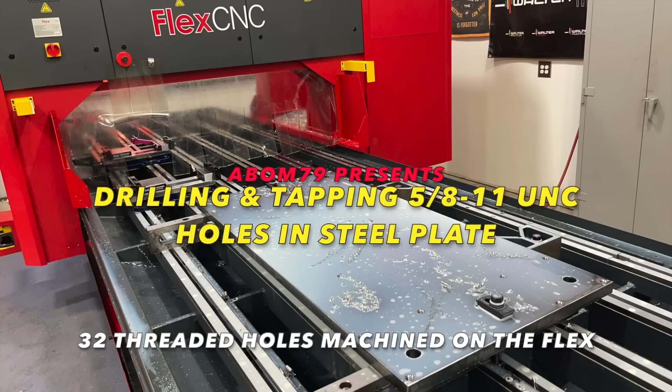Okay, so we just finished machining these plates right here with our tap size for a 2-inch UNC. So I'm moving on to the larger plates, these 27 by 59 plates down here. I'm getting the flex bed set up right now to accept these work pieces. Let me show you where I'm at.

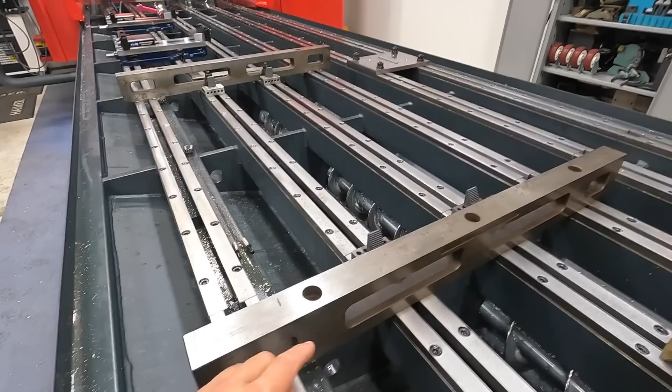Thought I'd fill you in on what we're doing. Since there's only 2 of these, it's pretty simple to set these plates down on the machine, tram in the side, and find the corner. I may end up putting a work stop up here, but for now this is what I've got set up. Got these large parallels right here, and this black line indicates how far from the end that plate's going to be sitting.

So I'm just going to have it centered on these parallels. We've got a couple of toe clamps holding them in place so they don't move. I use my machinist square to get them nicely squared up with the bed rails. Then I have these positioned centered so that whenever we do our machining, we'll have a 5/8 hole pattern in all 4 corners. This will straddle in between the hole pattern, so the holes will be on either side of the parallel on both sides.

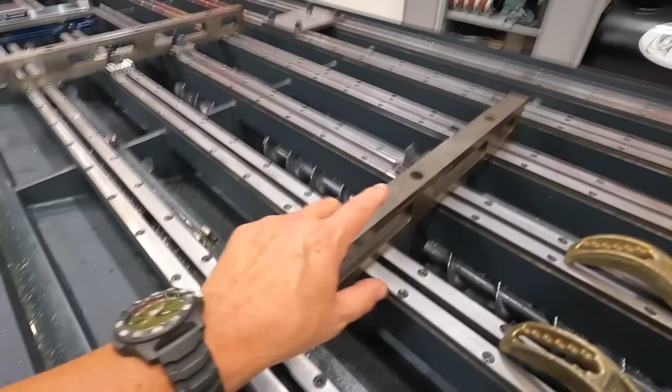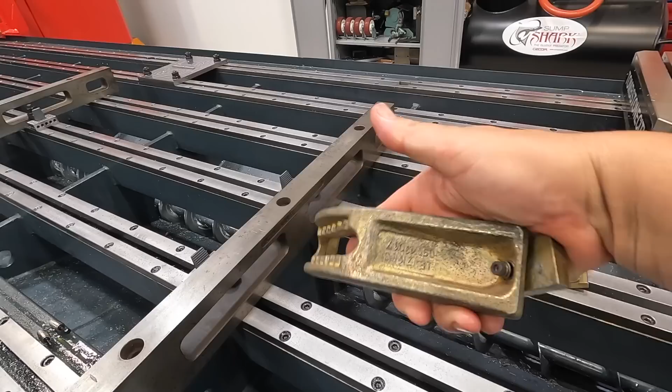Probably what I'm going to do is end up using some clamps like this. This is some of those Lenzkes - yep, Lenzkes, we got these. I've got some bigger ones as well, and we may be able to clamp, because really what I want to do is reach over the plate. It's going to be hanging over this parallel just a little bit, so we may go with the larger one so we can reach over the plate and clamp down on top of the parallel, not out here where it's overhanging.

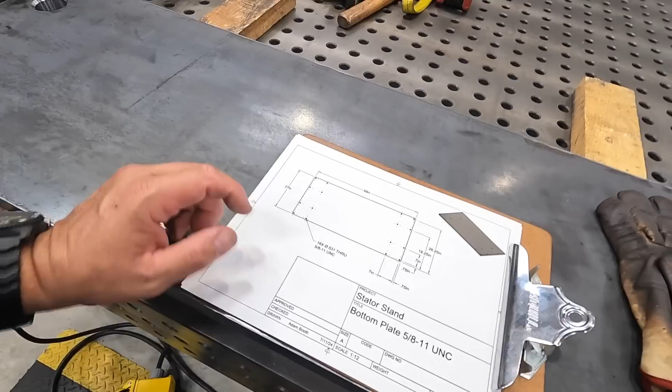But I needed to do that because the holes on these plates - I'll show you, here's our print for the bottom plate. You can see how close to the edge of the plate our holes are. You only got about 3/4 of an inch - well, it's 3/4 from the edge to the center of the hole, so they're going to be right out on the edge of the plate. So we have our parallels going right between the hole pattern. You got 7 inches center to center, and we got our parallel sitting right there.

All right, so that's what I'm working on. I'm going to continue to get this set up. We still got to get it up here on the table and get it clean. I still got slag under the bottom, and I want to get it cleaned up like we did these guys right here. So I'm going to keep working on that and bring you guys back whenever we make some more progress on our setup here.

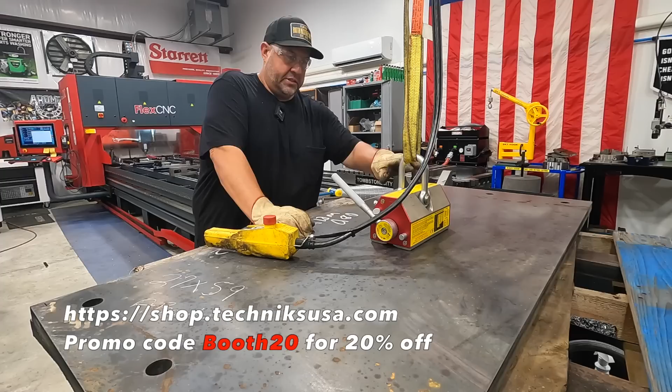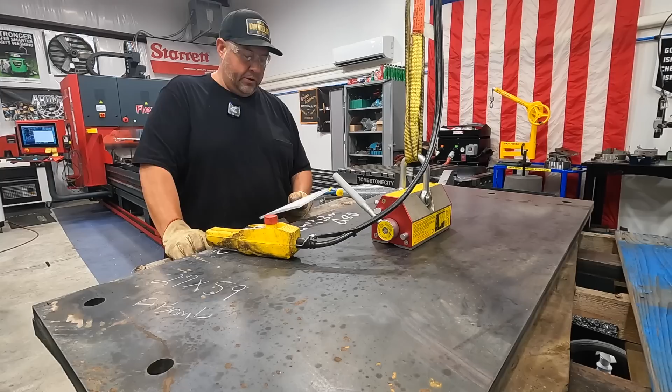I have been absolutely loving my new earth chain magnet. This is the ELM 600, good for 1,300 pounds. I was going to mention the weights of these earlier and kind of forgot, but I had this written down, and you guys can correct me if I'm wrong. We got 1.25 inch thick material. These plates right here I've estimated weigh about 578 pounds a piece, so right around 600 pounds each. And then the ones with the 2-inch holes in them weigh about 256 pounds a piece, so those aren't too bad.

We could technically lift both of these steel plates if they were clamped together with that one magnet, but we're not going to do that - just going to do the one. What I love about this thing is that I can position it where I want and then engage it with this handle. My dad's old Magmate, which is tried and true and we used for many years on a lot of jobs, gets the job done, but you have to use a little more muscle to get it positioned, because there is no on and off - it's just a cam lever that picks one side up off the material, then you have to pick it up off there. This one just allows you to set it in place, maneuver it where you want, and then engage it. So it just makes it a little more convenient.

So we've got it centered up on here, plus the weight of the Noga and the camera on that side.

All right, we're up. What I usually do is try to jar it a little bit, bang it around.

It's not going to come off there, so we're going to set it right over here on the table so I can get it cleaned up. We'll just be doing one at a time. I really don't have enough room to put both of the plates up here, so we'll do one and then work on the other one.

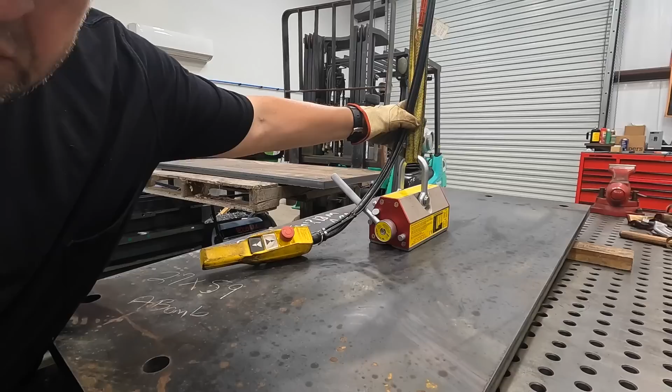I think what we'll do is go ahead and hang it, gotta move my tools over here. We'll hang this right side off of the table, and then the front side we'll hang it off there as well. Then I'll just rotate it.

There we go, I'll just leave that there. Get two sides cleaned and then rotate it and do the other two sides.

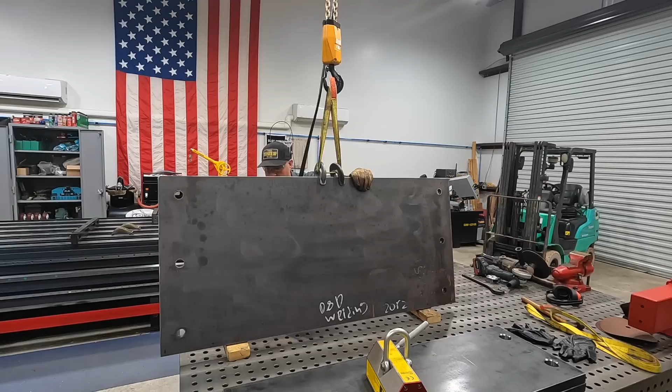Well, we successfully got her flipped over. You can see how nasty and dirty the bottom of it is. I think a lot of that's just from the table that they burned this plate out on. I'm sure they got a big flame cut table. I believe it comes from Sabel Steel, who usually cuts this stuff out.

Just go ahead and get some of the dust off of it.

I know it's not ideal to be doing cleanup work like this around your machinery, but this is what I have to work with right here. So it's something that I accept because I have my crane in here, I have my forklift right here. It's easier just to do this right here in the shop than it is to try to do this outside in the rain and the heat and without the jib crane here to help me get it done.

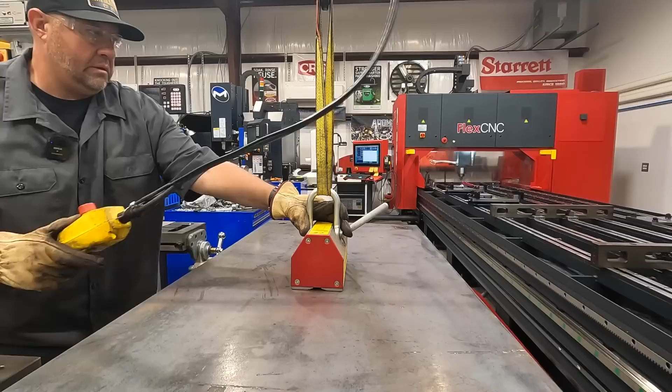Definitely not flat. I think I have the plate where it's going to work right there.

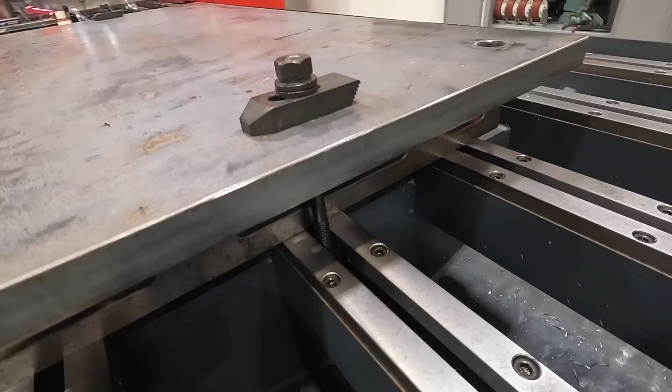I ended up going with a different clamping method than what I had originally planned, it just really wasn't working out. So I've got the plate shifted over that way so that those burnt out holes, the one in the center, is lined up with this rail right here. And so I have a stud and a strap clamp on both sides of that, right in the center, out of the way of everything.

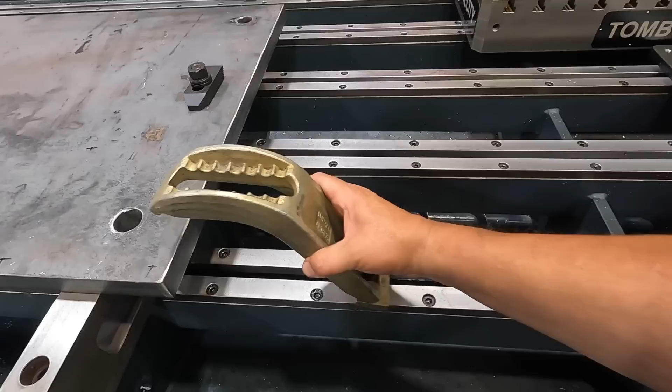Now I've got some Sharpie marks here indicating about where the holes are going to be drilled, and you can see where they're at. The problem I was having when this was slid over here, even centered up on those rails, I was going to try these large Lenco clamps, go in there like so and clamp it down. But the problem is where this was shifted at, this hole right here, and of course that one there, the clamp was right directly over where that hole is, so that wasn't really going to work out.

Now we could do it like this and put the Lenco clamp right in here somewhere. The problem I have with that is you can see how close to this hole it is, and it's still kind of close to that one too. So I would rather not be so close to a clamp and a stud and a nut up here where that hole location's at. So I was trying to come up with another easy solution, and that was the simplest way to do that.

I would rather have 4 clamps, but honestly we're just drilling and tapping holes. We're going to be doing a little chamfer on there, but I don't think all of the downforce we're going to be putting on that is going to make this plate shift around with those 2 clamps torqued down the way they should. So that's what we're going to go with.

I'm going to see about adding a couple of work stops, maybe to the back and maybe on this end here, we'll see if I can get those to work. But if those don't work, since we only got 2, it's really not a big deal to set it on here. We'll tram in the side, get that nice and straight, and then we'll find the corner here, and that'll be our work coordinate location, working off of that side.

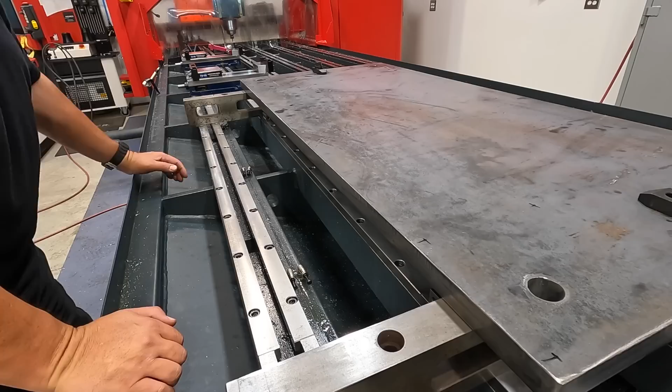Okay, we need to go ahead and get this plate indicated. We need to make sure that it's nicely aligned to our x-axis. So I thought we would do this a little bit different than I've traditionally been indicating. Normally we attach an indicator to the spindle and use the gantry to run up and down the parts to indicate. Always works really well. But let's try it another way.

I've got more of an old school machinist tool over here that we're going to use, and that is the Starrett number 57 surface gauge. We're going to use this as a reference where this plate is at right here. We're going to run this surface gauge up and down this bed rail here and use the pointer of the scriber to just kind of visually see how far away it is from end to end.

Once we get it kind of close with our scriber, we'll take this off and put a dial indicator on here and use it in the same manner. We'll set up a dial indicator and run this surface gauge up and down the side of the plate here and get it bumped in, just like if we used the gantry to run the indicator up and down it.

So how we're going to do that on your surface gauge, you have these 4 pins that push through. I'm just pushing that back when it's sticking down a little bit. There's a little spring inside that gives it tension. So we're going to push the front pins down on the surface gauge, and this is going to serve as a fence, a guide to guide the surface gauge down this rail.

The inside of this rail was actually machined. Whenever we set the machine up, we milled these to size, so we have a nice machined surface on the inside of the rail. The outside of the rail has not been milled, but it's probably pretty close, you could use that as well, but we're going to use the inside of the rail.

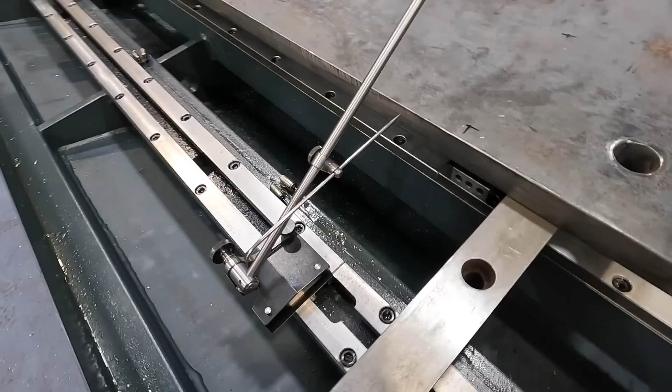And now we're just going to go ahead and use our fine adjust and run this pointer or scriber right up to the edge of the plate.

All right, so now we're scratching that side right there. And then what we can do is just run this down.

All right, and the plate on this end is actually going that direction, so we are crooked. And if you run this all the way down to this other side, we have a little bit of a gap there. It may be hard to see, but we've got about 1/8 of an inch gap, so we're somewhere around 125 thousandths or so, pushed that way, just right here, probably a little bit more as you get a little further down.

So now that we have our reference where we can run this back and forth, and it's just touching right here, what we'll do is go ahead and run the scriber down to this side with our surface gauge.

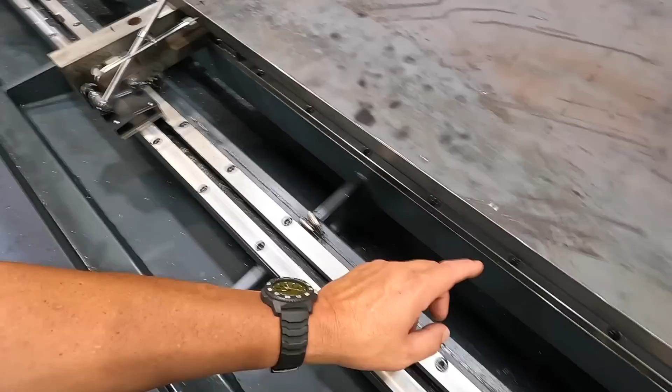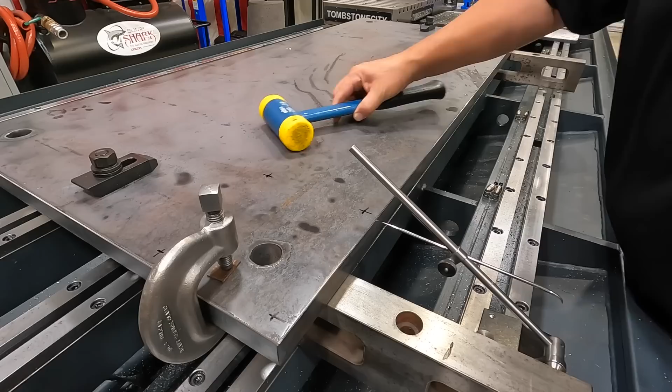Now we can start bumping the plate this way and try to get it to just kind of scratch the surface on both ends of the plate to get it pretty well even. Then we'll take that out and put our dial indicator on there and bump it even closer. I've added a heavy duty C-clamp here to give me something to hit, just because the other side of the plate is so far away. I'd like to be able to stand right here and see the gap as I bump this plate around. Let's see how it reacts first.

Yep, I can see it moving over, so just gonna make sure our surface gauge stays there. Now we're scratching this side as well, so we'll slide her down here to the other side and compare it. And it's scratching this end about the same, so it looks like we've got it pretty well even from end to end with our surface gauge.

Now we can go ahead and put our dial indicator on there and check it with that. We'll take the scriber off here to get it out of the way, so I don't risk running my hand into it. So we have this attachment here, the 57S, Starrett 57S, and it's a universal snug that'll fit on the surface gauge rod just like so. You've got a few different size holes in there for different stem sizes for all the different test indicators. So we're going to use our Starrett 196 back plunger indicator here.

We can just simply slide it up through the hole that matches the rod there, and we're going to hang it in a manner just about like this. We'll have to get it adjusted once we get it on the mill. Then we can use this like we did our surface gauge, our scriber I mean, and run this up and down the machine, taking direct readings with our dial indicator there.

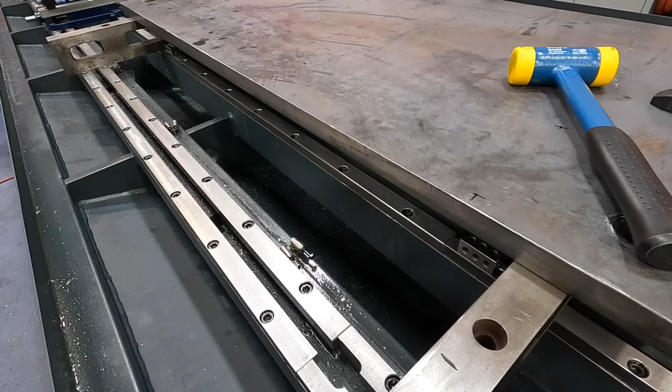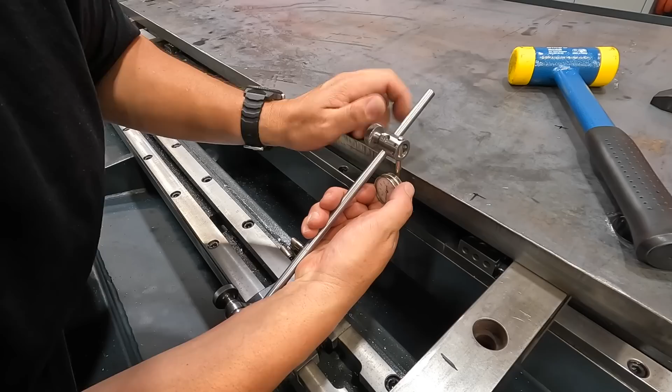All right, we're going to take our surface gauge utilizing our pins just like before. Set it down on the bed rail here, pushed up against the inside of that rail. Now we can adjust our rods here to get the indicator over a little closer. We'll tilt that one down a bit more and then loosen up the 57S snug, get it kind of close like that.

Now we have our fine adjust that we'll use to adjust the indicator. I'm going to twist that around just a little bit more. All right, about like that. So let's go up against our workpiece and use our fine adjust, dial it into zero. Now we can keep it pushed against the rail and slide this down, taking a direct reading.

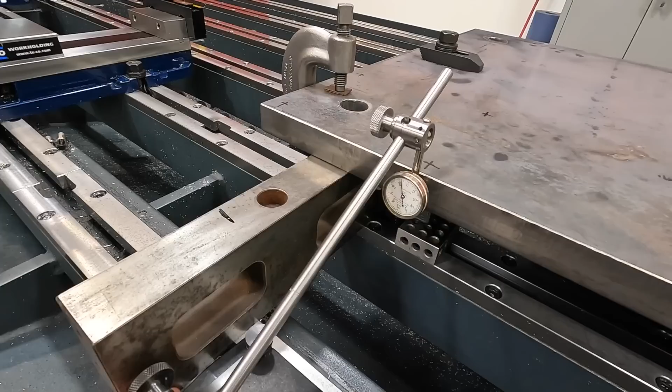So how close do you think we got it? I haven't bumped it since I used the scriber, and I just slid it down, and it looks like we are, I don't know, that's showing about 7 or 8 thousandths low on this side. So let's slide her back down.

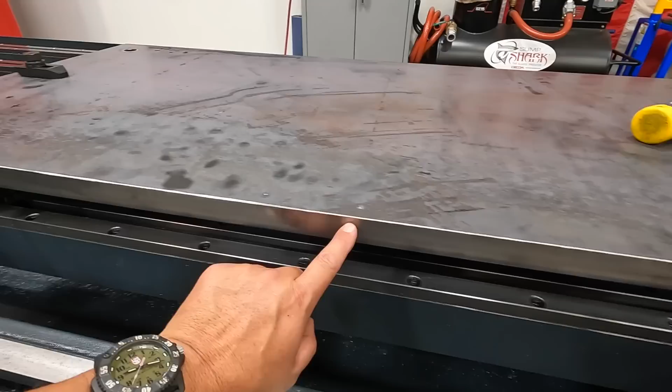All right, there's our zero point right there. So that's all we got to do is just use that in this manner right here. Now keep in mind, we are indicating a flame cut edge, so that is not a perfectly flat, smooth edge there. All we're wanting to do is just get it referenced about as close as we can from one end to the other, being on the same plane, and our same plane being zero on our dial indicator.

All right, so we'll be able to take our hammer and just go ahead and bump this clamp again, and we'll try to get as close as we can, zero and zero on our dial indicator.

All right, let's get our reading and see how close we got it bumped in there. Go ahead and slide this down, and you don't have to run it all the way down on the face the whole time. You can just bring it down here and then bring it right back in. Remember, we're going to this line here as our reference, so we're just kind of using that area. Looks like this side's 2 or 3 thousandths high, so that's an easy fix. We'll just take and bump this corner right here a couple thousandths back, and then we'll take another sweep and see where it's at.

All right, let's take another sweep and see if we've got it dialed in there. We just bumped it, tried to move it about 2 or 3 thou. That needle is hovering all over 0 there. You got some high and low spots, but I think we're averaged out really nice. So if we just keep it pushed in there, let's see where it's at. You can see it's just bumping around a little bit. You got a little bit of a low spot right there, but as we come right back down here to our edge where we started, right there about on the 0. So I'm gonna call this guy indicated in.

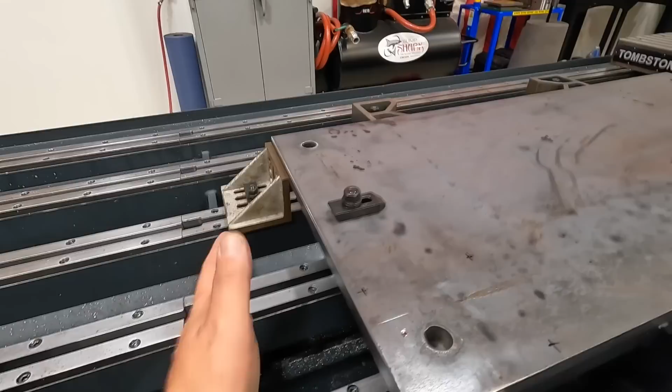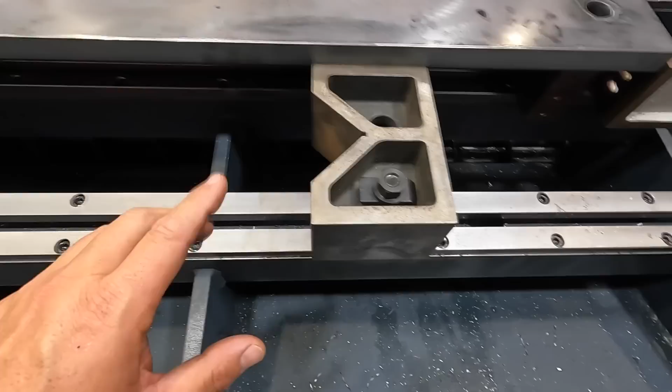Okay, we've got our 2 clamping studs torqued down nice and tight, and I've got our work stops set up now too, and these all work pretty good. That shorter angle plate worked perfect for this side right here. We got it pushed up against and tight, and then we got some V-blocks on the back there that worked out pretty good, let me show you those. This pair of V-blocks that I had in the box just worked out perfectly, everything aligned really well, so this was super helpful. Just went through the casted hole there and clamped it down. We've got it pushed up, so we have 2 of these to be able to push it back up against there, nice and tight. This guy is ready to go.

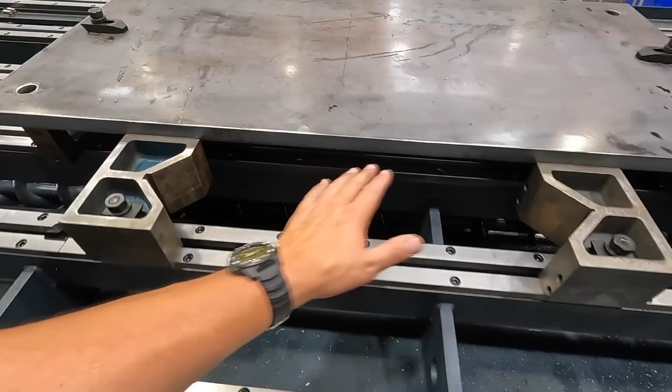So this is gonna be our origin point right here. We'll touch off here for our X0 and then touch off over here for our Y0. Okay, we got our Haimer 3D probe installed. Let's go ahead and touch off. This is gonna be, I'm gonna use G56 for this work offset. All right, we'll do X first.

Just about got to use some binoculars, it's so far away, but that's close enough. That looks like it's about on 0, so I'm gonna hit X for G56 right here. All right, I have our X zeroed out right there for that side. We'll back it off.

We're gonna do Y. That would be good enough. All right, let's bring her in. I'm gonna slow her down so I don't crash it. There we go, let's go down to tenths. All right, looks close enough. I'm gonna hit Y for our G56, set position. All right, there's our X and Y done.

Now I'll just take a tool, probably use our 17/32 drill bit, and I'm just gonna bring it down and touch it onto the work surface using a piece of paper. But before we do that, let's go ahead and easily back this out. We're in Y, so I wanna go back, get it off there. All right, then we're gonna go up in Z. Just like that, you bring it to me and take it out. I have our 17/32 drill bit loaded up.

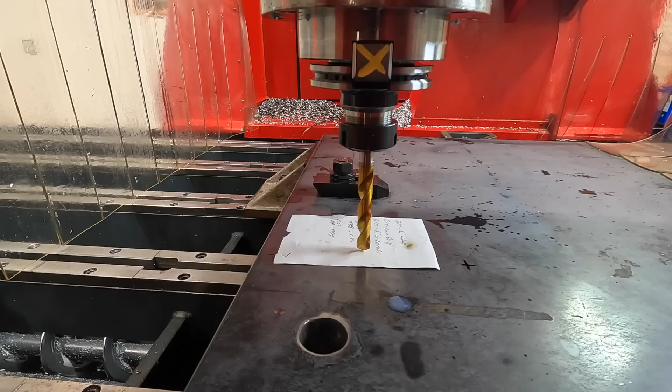This is the drill we're gonna use for the job, and we're just gonna do the old school trick. We're gonna touch the face of the workpiece off here, but we're just gonna touch it to that piece of paper. I've got it really close, and I'm just using the incremental jog distance of 1/1000, and we're just gonna come down until it gets tight on that paper. So every time I click the button, it goes down 1/1000 of an inch.

Let's do it like that. Now I can feel it getting closer. I usually, once it gets to about there and it starts getting tight, I go down about 1 more click, and that'll be close enough. So that should be within maybe 2 or 3 thousandths of this work surface. And keep in mind, this is a hot roll plate, so the surface is going to have a little bit of waviness to it. We're just trying to find a nice average. We have a clearance of 200 thousandths, so all the tools come down to 200 thousandths above the surface there, and then it begins its feed at that point. So this is going to be really good right there.

So we'll go into our work offset. It's going to be G56.

And we're going to Z this, subtracting the length of our H19 for tool 19 right there. I just ran through my typical air test with our workpiece, and everything looks good. I've double checked my program, and I even made an adjustment.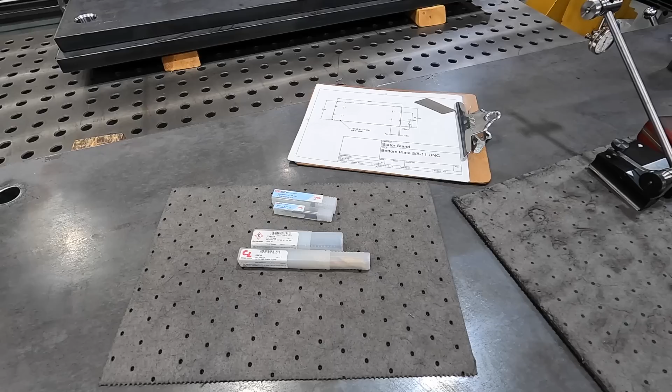We might have to wait a few more minutes on making chips because we've got a huge thunderstorm about to roll through. There's a lot of lightning, and I don't want to risk the power glitching on us in the middle of a program. So I'm probably going to wait for that.

I feel bad for all the people out on the beach because today is the big Blue Angels Air Show, and they expect about 150,000 people out there. You might be able to hear that rain coming down - they're getting hit with lightning and thunder right now too.

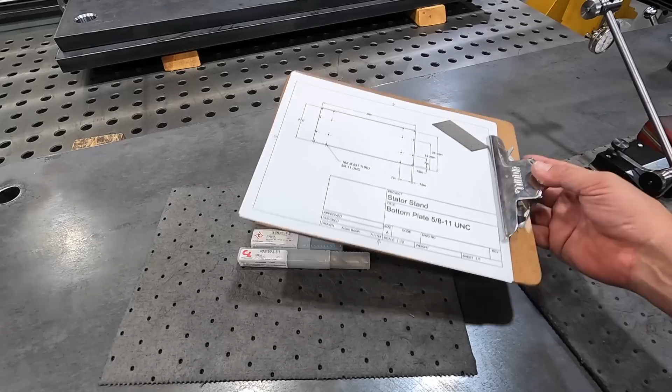So anyway, I wanted to show you this. This is my drawing that I made, and you can see where all of our hole locations are. This is going to be our origin point right here - this is where we touched off our Haimer probe, and it'll actually start on this corner though.

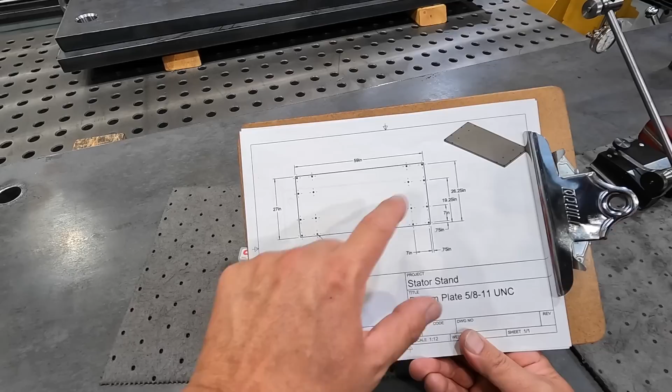So it's a very simple program. We're going to spot all the holes, then it'll grab a drill and we'll drill all the holes. Then it's going to grab that same tool that we spotted it with, chamfer all the holes, and lastly it'll grab our 5/8 tap and tap all the holes, and then that'll be it.

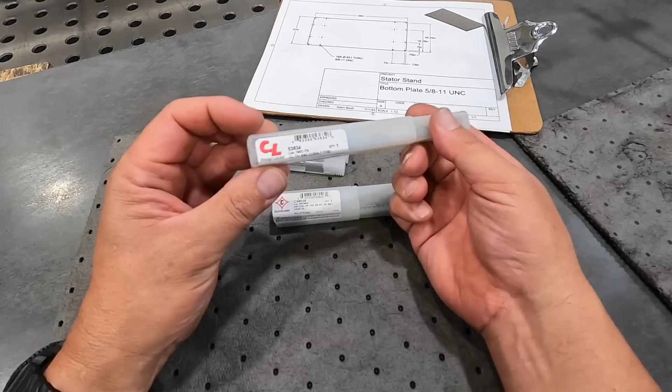All right, so the cutters that we're going to be using - I wanted to show you what we're going to be running today. I got a couple new cutters for this job. Our drill is going to be the Chicago-Latrobe reduced shank drill. This is high-speed steel, 1/2 inch diameter round shank, with a 118-degree split point, and I have 2 of these.

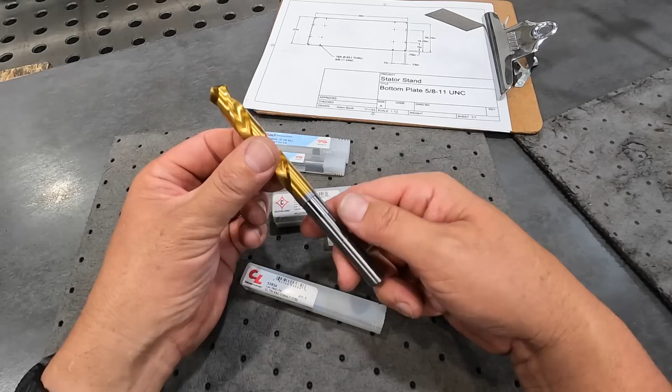These are inexpensive when you compare the price to a solid carbide drill. So I got a couple of these, and we're only doing 32 holes - it should last for many, many more holes than that. And these kind of drills here, I can actually regrind them myself because I've got a little drill grinder. So anyway, that's going to be our drill bit.

For our tapping, I've got a couple of these new Cleveland taps. We're going to be running the spiral fluted tap today. Technically I could use the spiral point tap, but these were in stock, so I went ahead and grabbed a couple of these. This is the Cleveland 5/8-11 spiral fluted tap.

Now for the spot drill and chamfering, I have both of these 3/8 diameter drill mills in the machine, so I don't have one to show you, but I do have a 1/4 inch diameter - this is the same thing. This is the YG-1 brand, and I just call it a mill drill. You can use it to spot holes, drill holes, chamfer - this is a 90-degree angle on there - and you could also use it for side milling as well. So it's a pretty versatile tool, and that's what we're going to be using to spot our holes and chamfer them.

All right, so that's our cutters - the 3 cutters that we're going to be running today on this program. So I'm going to wait for this big bad thunderstorm to move its way out of here before I start this program.

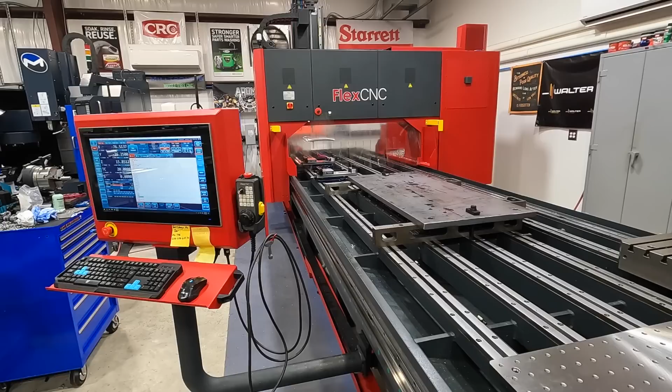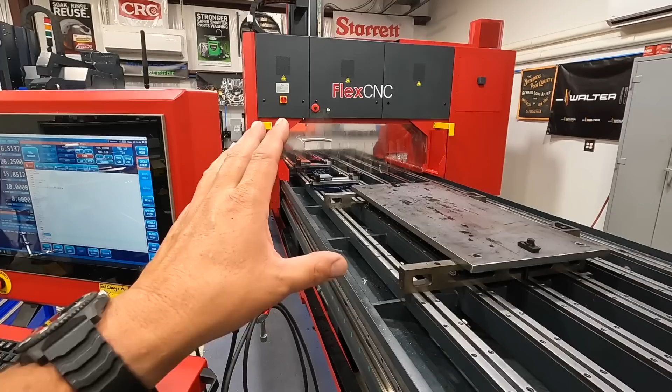And when it does, we're gonna get started making some chips. That storm's still moving through, but I decided to make one more air cut since I made a little adjustment, and I went through the complete cycle this time. To machine this part, we're looking at 15 minutes and 8 seconds, and that was with our first tool preloaded in the machine, so it didn't have to do a tool change when it first started. So 15 minutes is what we're looking at, I think that's pretty good.

I think we're ready to start making some chips. That big thunderstorm has moved on, doesn't sound like it's right next to us now, so let's get going with this. I have adjusted our Z, so we should be down on our work surface now.

In between the drilling and tapping cycle, I got an optional stop. We'll go ahead and clear the screen, the camera, so you guys can see it a little bit more. But our chamfering, our spotting and chamfering, we're not going to run coolant, just our drilling and our tapping. So, all right, let's roll with it.

I'm going to sneak up on this and make sure that we are on our proper Z dimension, so I don't crash any tooling.

Just going to bring this down slow, just to verify that we're good on our spot. Should come down to 0.2. Okay, that looks good. I've got 100 thousandths depth on that spot. We're going to go back up to our 100%.

All right, here's where we check our clearance height. Okay, it's good. Got about a half inch clearance over the top of that flange nut.

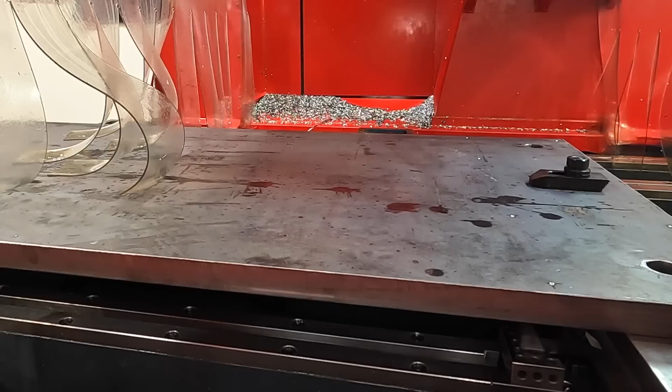This is our 17/32 drill bit, tap size for 5/8 11. Oh, all right, I'm gonna stop it here because there's one thing I did forget. I need to go into our manual controls and turn off coolant interrupt. There we go.

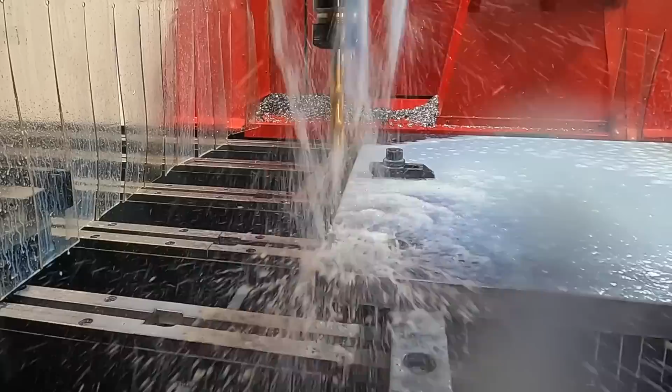Walk this over and make sure everything looks good to go. We are doing a peck drill cycle here too, so it'll break the chips. All right, it's looking good.

All right, good clearance over our flange nut there. Chips are looking good too. That drill's doing a good job.

In case you're wondering, we're running that. I believe I had it set at 90 feet per minute, so it's running right around 600 to 650 RPM. And I believe the feed is either 7 or 8 thousandths per revolution is the feed rate on that.

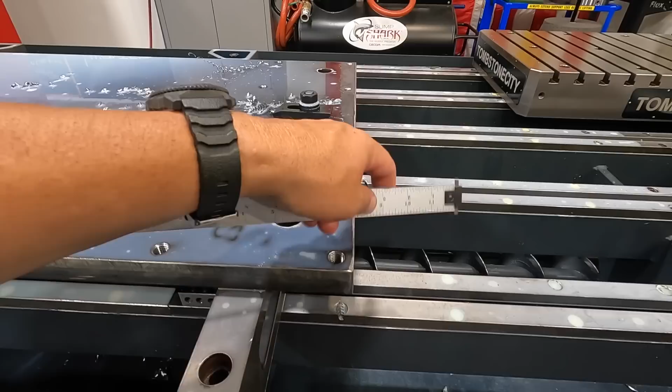Everything is good. And then you can go from the edge to the center of the hole. Looks like it's about 3/4. Remember, this is flame cut, and it was just slightly undersized there too. This side right here is probably a little bit closer to being exactly 3/4 from the edge, and it looks like it is there. 7 inches. 7 inches. We are good.

All right, we've got our second workpiece located in there. We've already got our clamps torqued down nice. I made sure that we were bumped over against those two work stops there and this end stop, this angle, so we're nice and flush against our work stop. So we should be in the same exact location. Everything is ready to go.

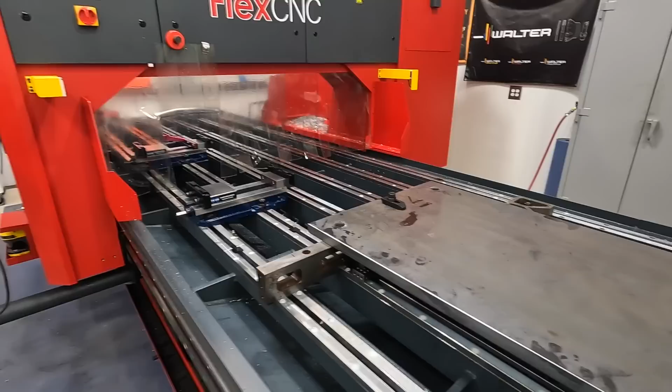The only modification I made to our program was that last line where it's gonna take the gantry down that way where it's sitting right now once it's finished. That's the only change I have made. So I'm excited to see this guy get finished up.

I'm really happy with the way it's been rolling. I probably won't get a bunch of video inside since we just showed the other one, it's gonna be more of the same. We might see the flex doing its thing on the outside as we're cutting this. But man, I am just so happy. I'm over here smiling because every time I get to do a CNC job, it makes me feel good that we have a good finished part that's on size and I haven't messed anything up.

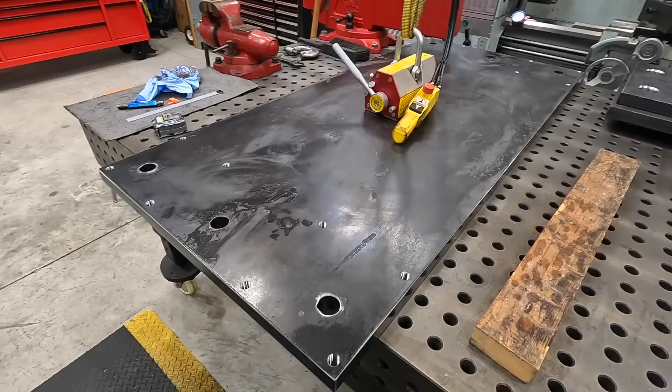So it's looking good. We still got to tap these guys. That's a separate video. We're going to be loading these guys up once we're through with these plates here and get those finished up there as well. So I'm ready to continue on, and let's get this job finished.

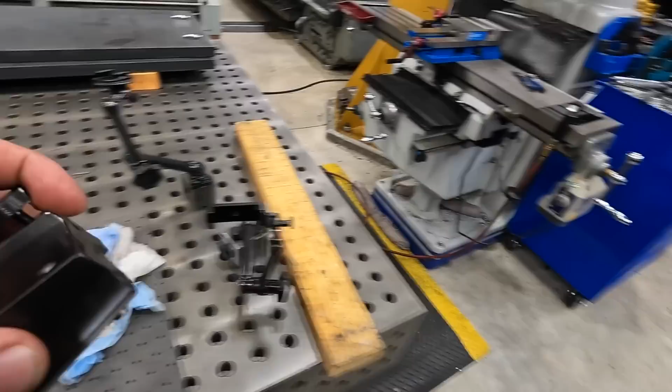I almost forgot about this. I wanted to give it the inspection with our surface gauge and our dial indicator. I wanted to just see what the difference was. We already got the rail wiped off. So let's see, should be nice and straight.

All right, so it's on about 31 thousandths on the dial there. Just a few thousandths. Looks pretty straight to me, so it looks like it's on about 33 on that line, or in this position, I'm sorry.

I'll check down here again. And it's on about 30 right there, so only a few thousandths difference. That's good enough for me. Let's go ahead and get this out of the way and send it.

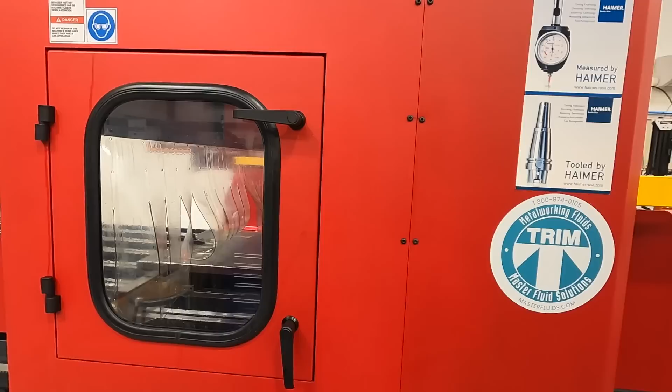I did notice on a couple of the corners, the plate sounded a little bit more echoey or chattery. I'm sure that's because the plate isn't actually sitting perfectly flat, parallel, with just the two clamps we're using to hold it down. But everything should be fine.

Just drilling and tapping, very little pressure against that with that chamfering mill.

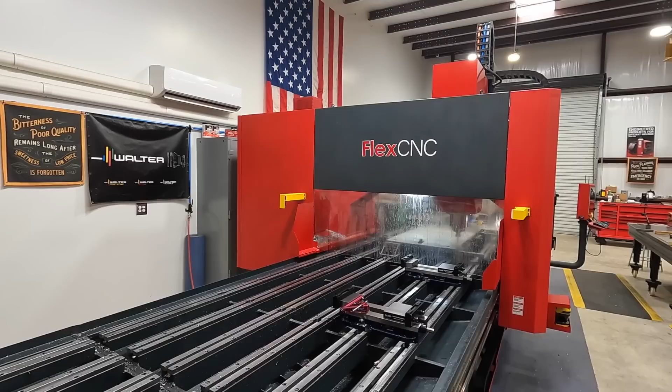Let's see if we get any kind of chattery sounds on that corner that we're about to jump to. Well, not that hole, we want to go to the outside. It'll be this hole here.

Nope, nothing any different. Just the start of it as the drill gets full contact inside the hole.

Moving on to our chamfers now.

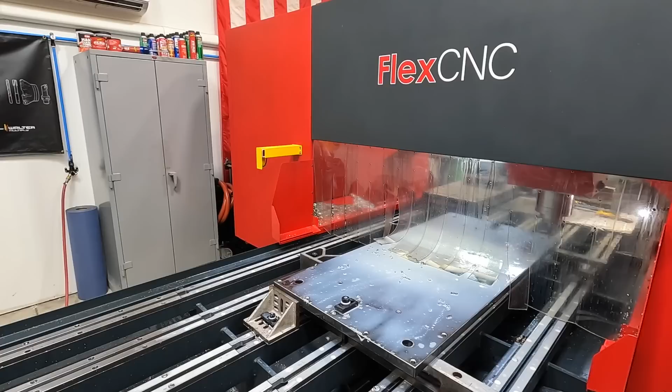Moving on to our tap cycle now. I got my phone in there trying to get a little bit of close-up video of that.

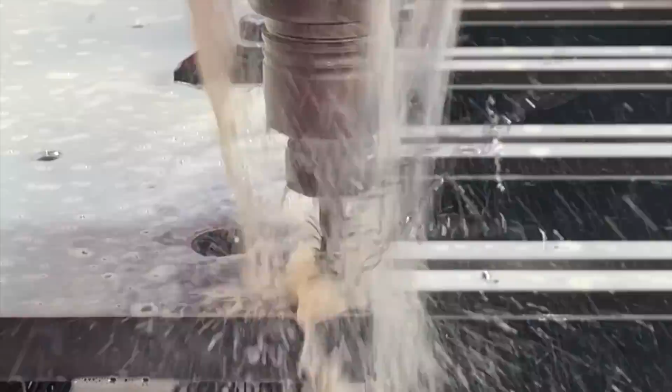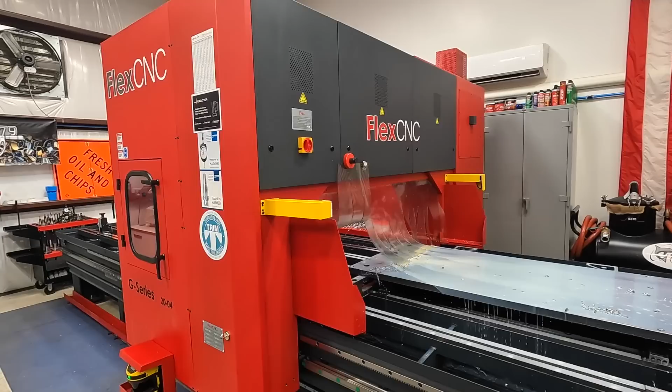Z0, come on X. Got it. Got it right that time.

That is awesome, I am smiling over here. This makes me feel really good. I'm very happy with the way this has turned out. I really just couldn't be happier. I don't know what else to say about it.

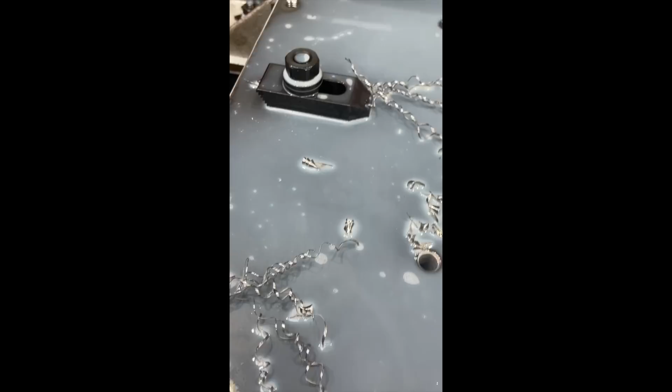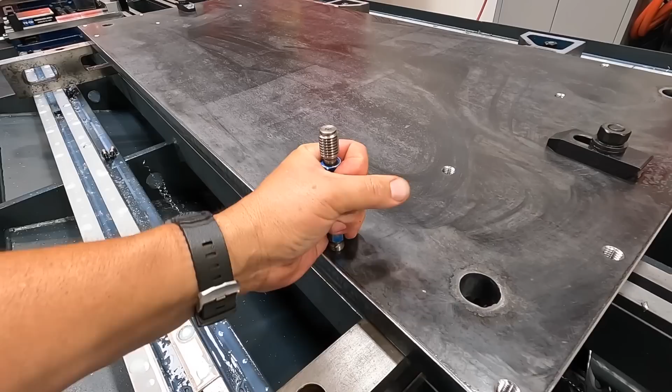All right, last thing to do is just give it a check. I guess we'll start with our no-go side. Does not want to go.

All right, go gauge fitting just like it's supposed to there. I'm sure it's redundant, but we'll do it anyway. Let's check one of these over here.

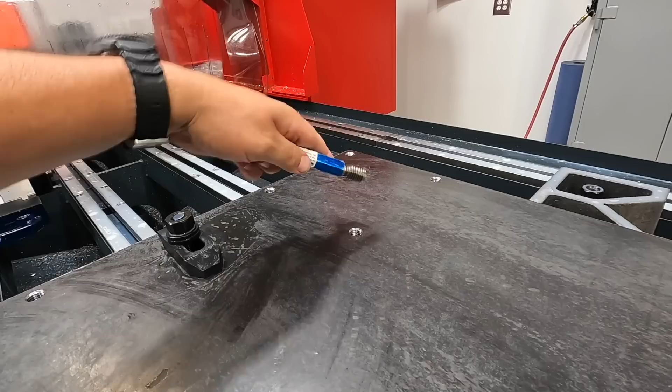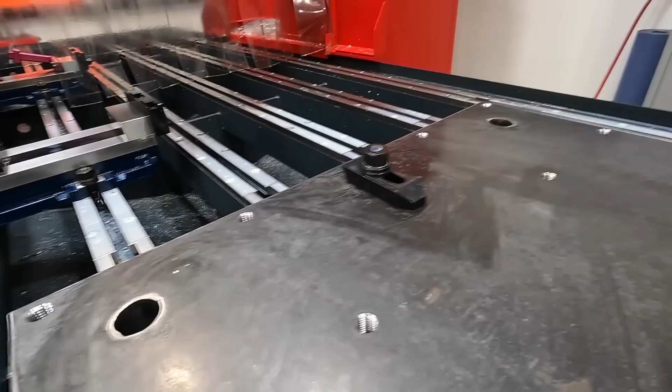As you can see, good to go. That tap, that Cleveland tap, did a beautiful job on those threads. And I feel really good that we're running that MicroFloat tap holder made by Techniks, to make sure that we stay aligned with the thread there as we're cutting it.

All right, well, this job is done, the bottom plates anyway, that's what these guys are, the bottom plates. I don't know if I had mentioned it before, but these holes are actually for some casters. They have some extremely heavy duty casters that they are purchasing from McMaster Carr that has this 7-inch spread bolt pattern on there.

But I'll see, the welding shop's the one that's going to be fabricating the stand. I'm going to see about maybe getting a video or a picture or something of it whenever they have it all welded together, so we can show you guys what it looks like after it's all finished up, ready to go to the customer.

But my part is done for the bottom plates anyway. As I said, I've still got to finish the 2 top plates tapping the hole, but that is a separate video. You guys may have already seen that at this point, but that's the last step, getting those other 2 plates tapped, and we'll be finished up. That's going to be it.